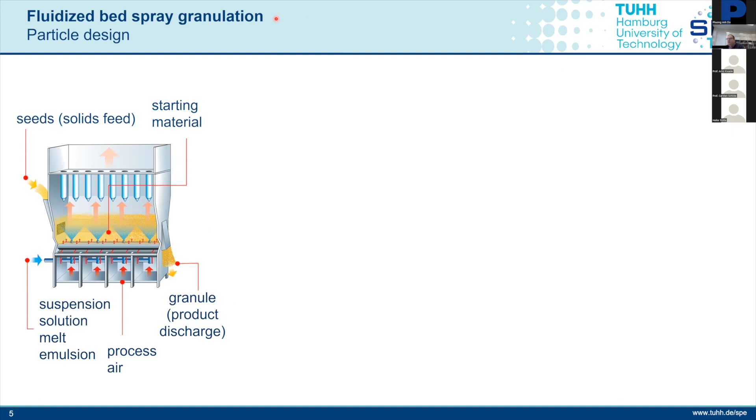Okay, let's go a bit to the developments which has been done since the last PARTEC. We can see that fluidized bed spray granulation is still a very hot topic, used for agglomeration or for coating and granulation, either to create very porous blackberry-like structures or core shell-like particles, onion-like structures. This can be used for many applications: fertilizer, detergent industry, production of catalysts, or instant powders.

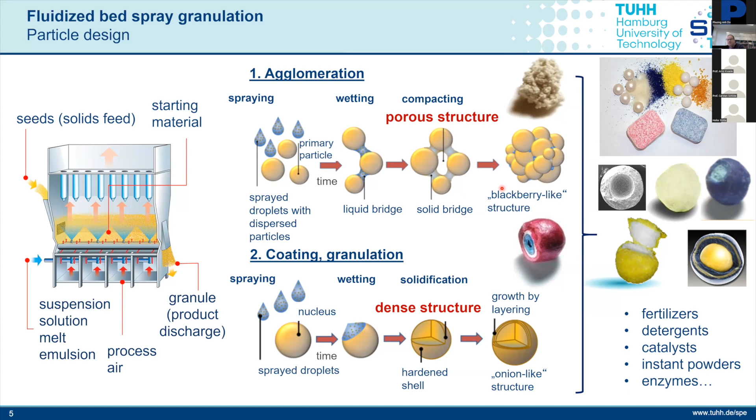In the meanwhile, we work on plant-based milk powders. That is also a hot topic, which was not actual in 2019. So plant-based materials, the coating of enzymes in biotechnology.

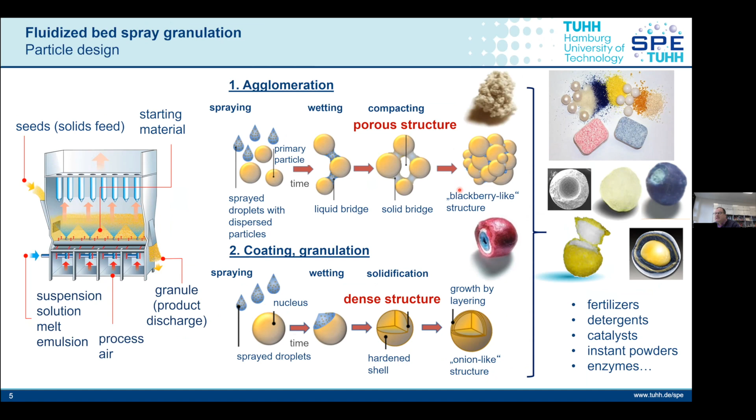What we have learned during that time is that we have a time schedule and a hierarchical landscape, so to say, of our different simulation approaches, which ranges from sub-micro versus micro, meso, macro scale. But nowadays we have also much better advanced measurement methods, and we have the hot topic of scale-up and digital twin, which came into this story.

And therefore we should also focus in the talk of Professor Schilde on this artificial neural network and digital twin work, which has been done during that time.

And of course, we can look into the particle structures by bonded particle modeling. We can also work and have extended the CFD-DEM approach. I will later on talk about recurrence CFD for real-time simulations of the flow structures.

And of course, the interaction with droplets. The question is what happens for the wet case. Finally, the flow sheet simulation is of great importance in the meanwhile, so we can really simulate very complex connected chains of processes with solids, and the instantaneous process is also of great importance.

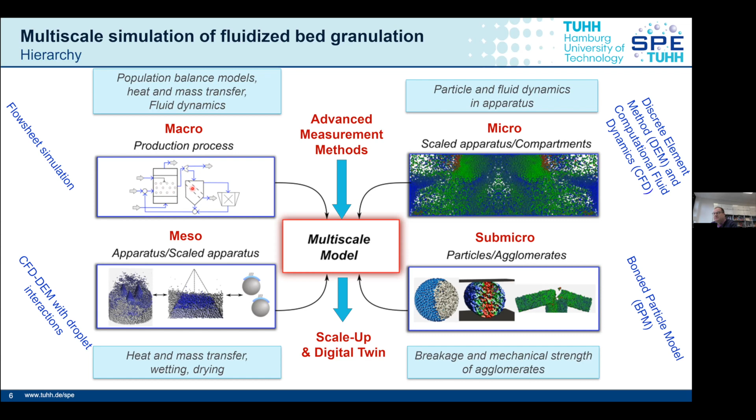And of course, also the advanced methods for the measurement of particle micromechanics. As you can see here now in this chart... you can see the collision between particles for the dry or wet case is nowadays measured, which wasn't possible a few years ago.

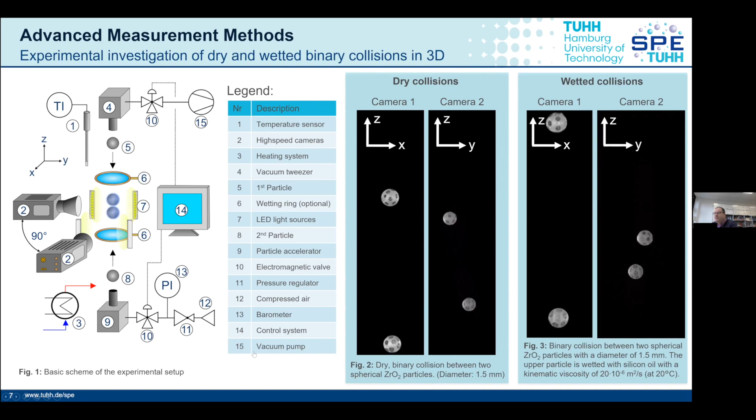So we want to develop criteria at which point such particles might bind together and form agglomerates. The computer is able to detect these collision events, to produce any kind of velocities, in translation and oblique direction, so we can calculate the rotation.

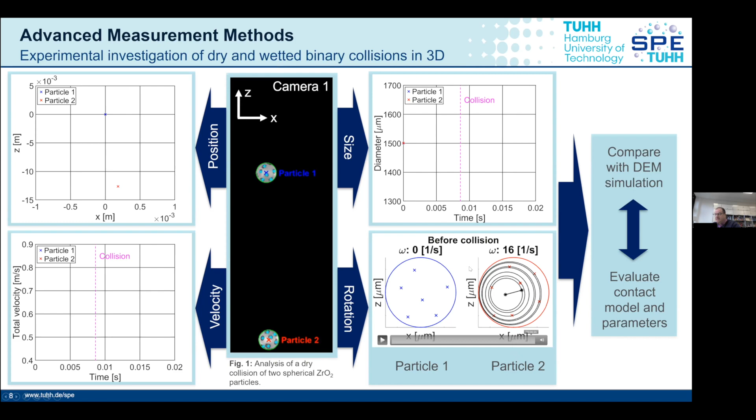This is, of course, very important to simulate the probability of the uniformity of these coating layers and to evaluate the model and the parameters, the calibration, so to say, of the DEM models. We have done a lot of effort in this direction.

Of course, for advanced measurement methods, it is very important to say that lots of development has been done regarding temperature measurement, moisture measurement. One can also measure online, in situ, these properties nowadays for the particle as well as for the gaseous phase.

The droplets can be measured, and also, of course, the question arises: what happens with a single particle, with a single grain? Are we able to measure the temperature directly in the process? We are working on that topic with such modified impedance spectroscopy sensors in the meanwhile.

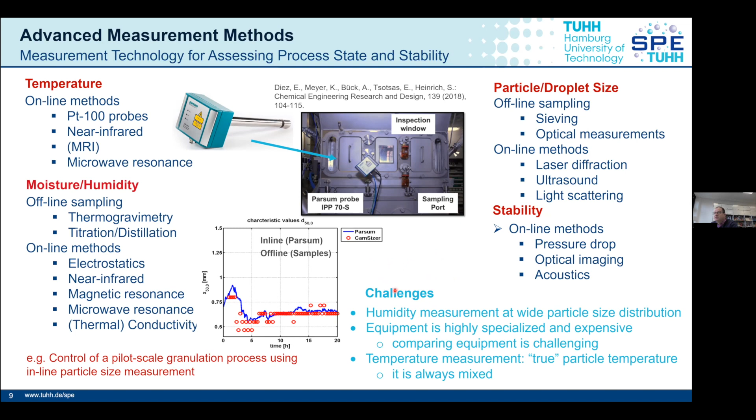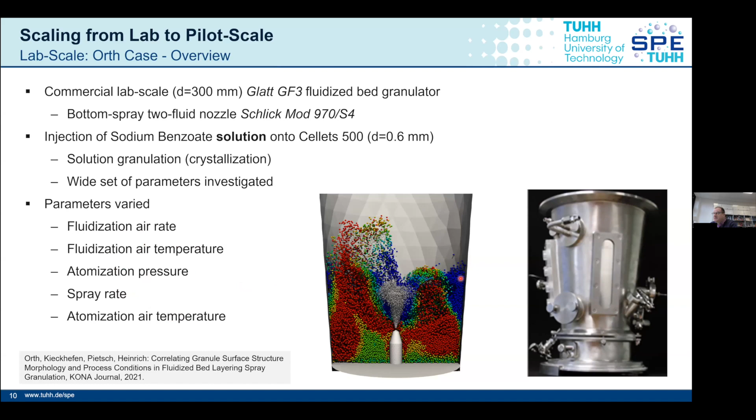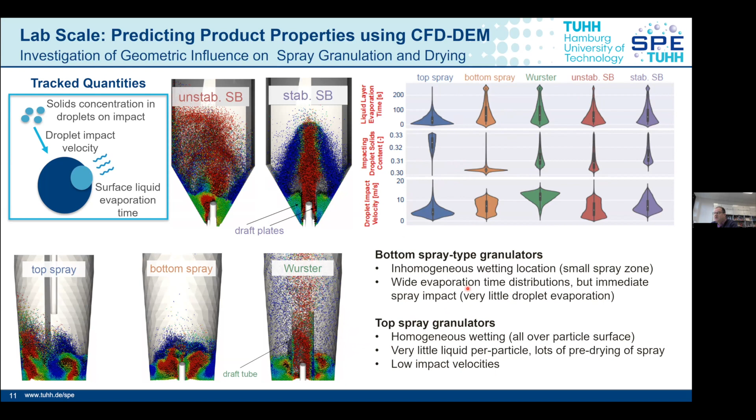Another very hot topic is, of course, the question: how many nozzles do we need in order to get a uniform distribution, especially also for continuous processing, and the scale-up from the small machine to the large unit, and to predict also particle properties like roughness of the surface. This strongly depends on the amount, on the number of droplets, and the uniformity in this reactor.

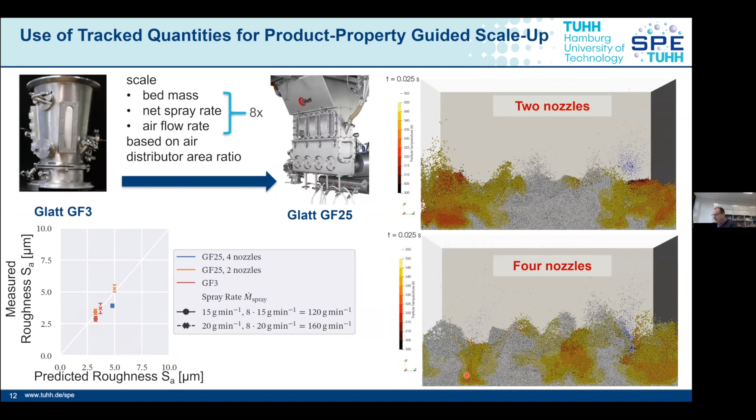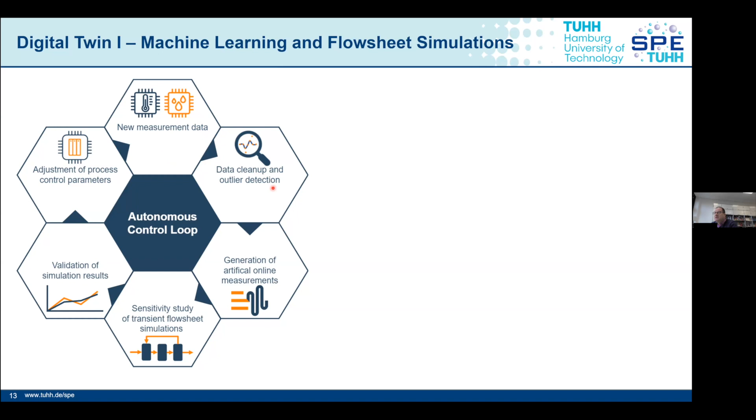In the meanwhile, we are able to calculate these out of the CFD-DEM simulations. But the next very big development has been done with respect to new measurement data, which we can detect, to develop also outlier detections. Here's an example with respect to digital twin. We apply nowadays the machine learning tools.

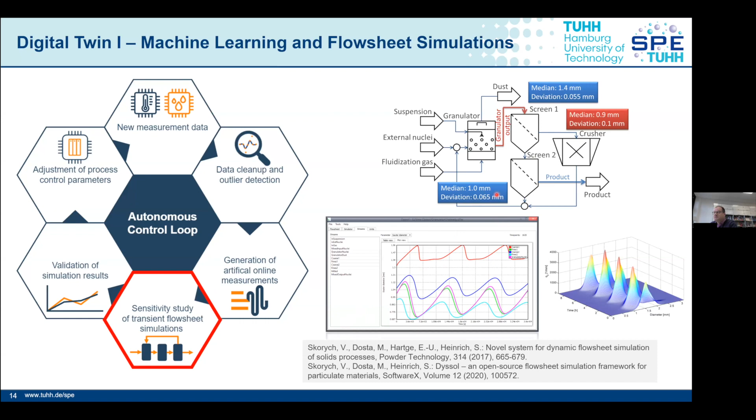Of course, the sensitivity study of transient flow sheet simulations is the very next big step, where we might prove such steady state or unsteady behavior by means of flow sheet simulation tools. For that, we have developed a flow sheet simulation software system, developed within our DFG priority program in Germany, which stands for dynamic simulation of solids processes, meaning we have instantaneous processes, batch and semi-batch, and so on.

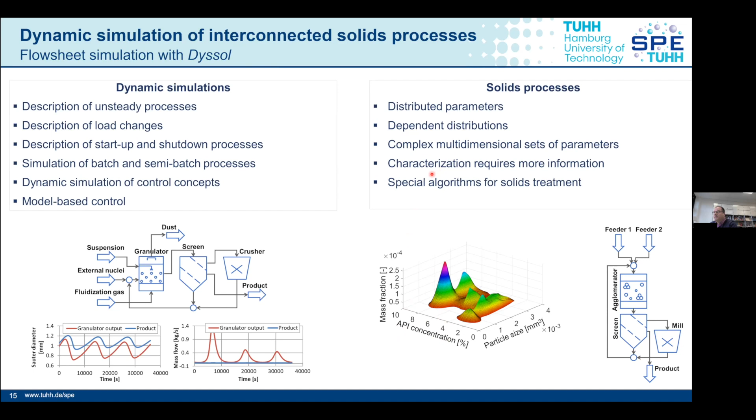We also have the distributed properties of the solids. Solids can have distributed properties like API concentration, very important for the pharmaceutical industry, moisture, particle size, and so on. This came into this dynamic flowsheet simulation software tool, Dyssol, which is now able to simulate very complex flow streams.

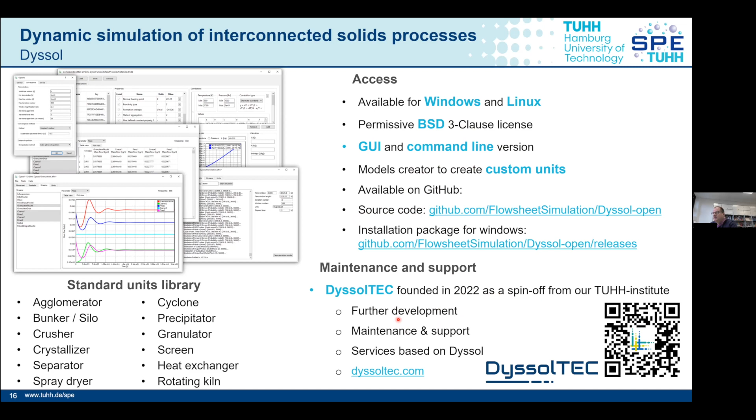And we have decided to go with open access. So we have, so to say, a source code which can be changed—an open source code. For the maintenance, a new company has been founded as a spin-off from our institute, so that this is now available for the community. It's open source based, which is very novel.

One of the last slides will show you the big picture of the digital twin. So we can now also go the second way, working with such recurrence surrogate assisted multiscale models, which describe the particle kinetics and also size distribution.

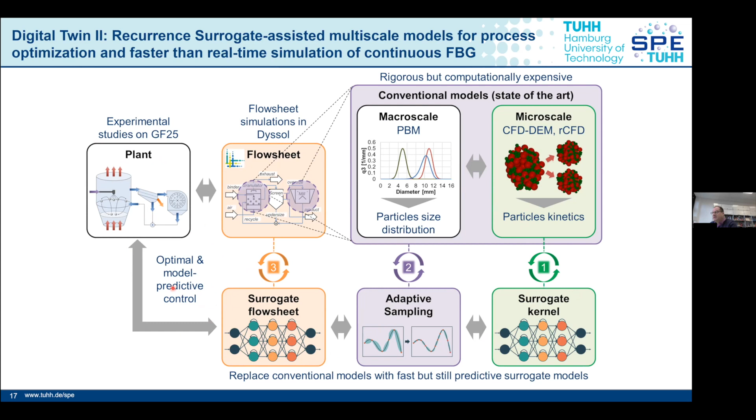With such surrogate kernels and adaptive sampling, we can feed the flow sheet with a surrogate approach, and compare this with the mechanistic flow sheet simulation tools, getting information for optimal and model predictive control—very important for control of the process. The hot topic here is the autonomous reactor concept, which is the underlying concept.

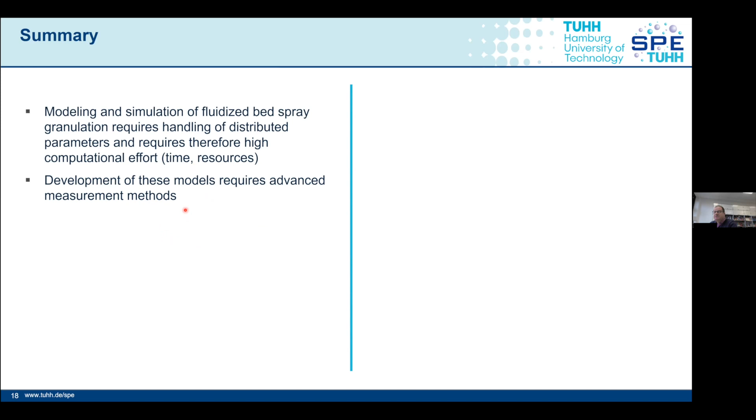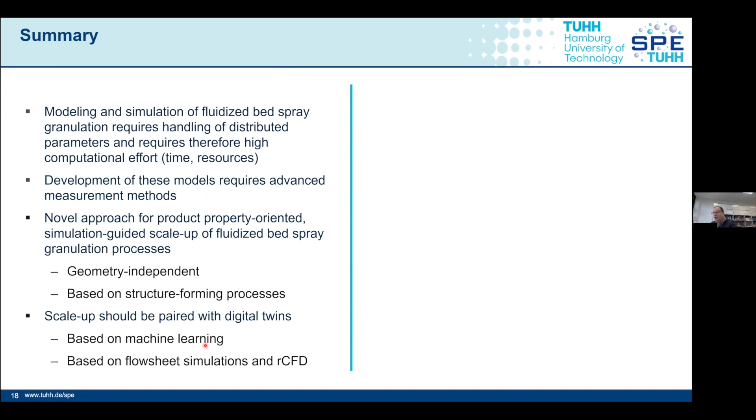To summarize, during the last years we were able to improve the approaches for this kind of simulation of fluidized beds, getting also information about particle properties, especially by using digital twins. That is a new hot topic during the last few years, based either on machine learning or on flow sheet simulations and recurrence CFD, which runs in real time, or faster than real time, meaning you need to do such CFD-DEM simulations, but by using such recurrence plots, you are able to be faster than real time.

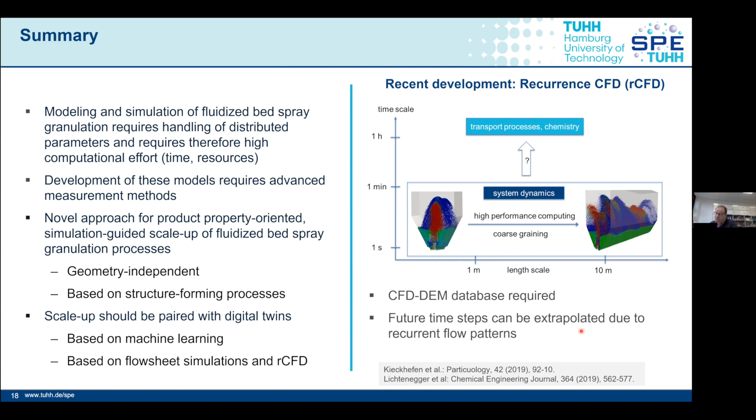The original work has been done by Stefan Pirker, Professor Pirker in Linz. We have some current projects together, and with this database you can go on for future time steps which can be extrapolated due to the recurrence flow patterns. That's really the beauty of this work.

What else is to say, in the meanwhile we are able, at least here in Hamburg, to look into systems with very high resolution with respect to time and local coordinates. We have the worldwide unique prototype machine of an MRI, which is in a vertical direction. The new director of the newly developed Institute of Process Imaging is Alexander Penn, who came from ETH Zurich.

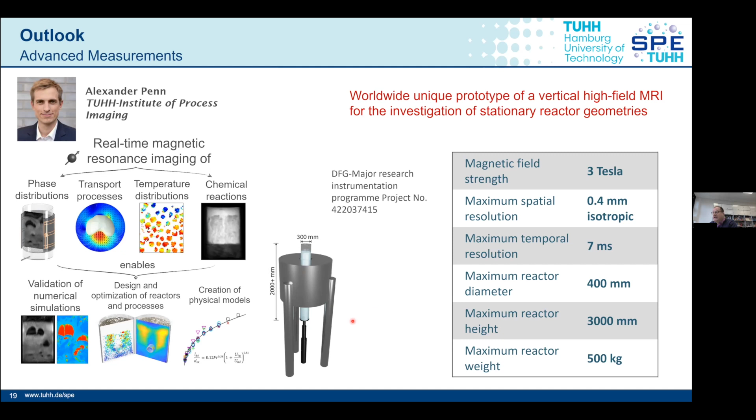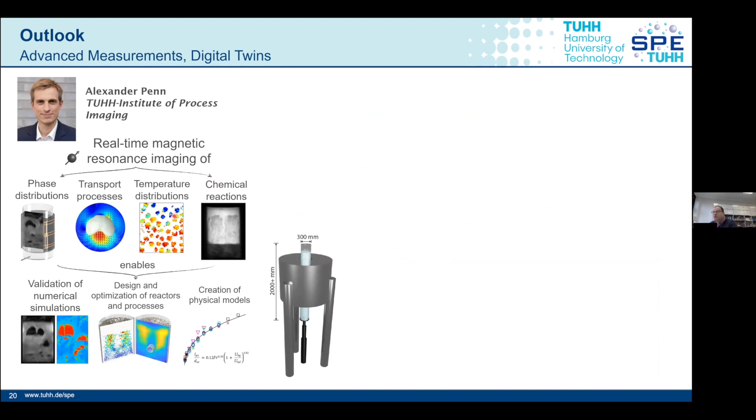Now we install such an MRI, which is 40 centimeters in diameter, so we can work with real larger lab or pilot plant scale fluidized beds, up to 3 meters in height. So we can measure the fluidized beds with respect to temperature, phase distributions, chemical reactions, and so on.

The next step required is that we adapt this information into such a communication interface in the so-called knowledge module for real-time data processing, based on flow sheet simulation and control theories, to really have online control of a large and small scaled fluidized bed system. So we can really adapt this information to a system which can be used then also in industry.

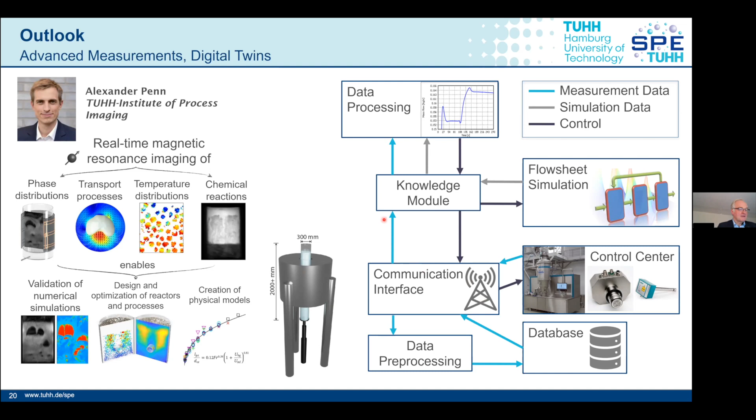As you already heard, for the new PARTEC 2023, we have the motto Particle Technology for Sustainable Products. I had the idea in this direction because everybody knows about climate change and the energy transition, and I think we have to do a lot of work in this direction. Hopefully I can show you in the next 10 to 15 minutes that particle technology can play a really important role in this transition and getting a more sustainable future.

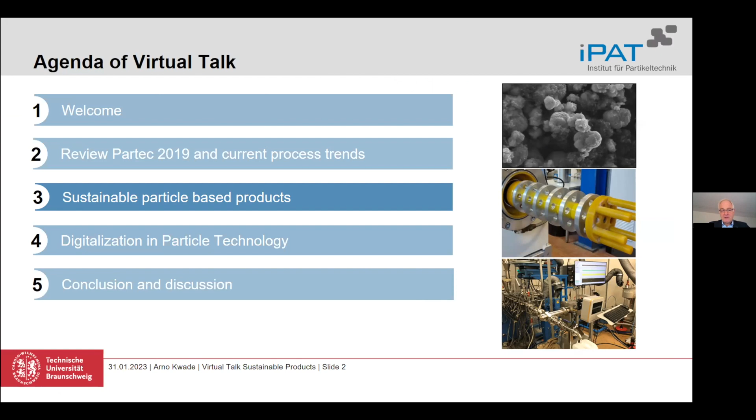So after Stefan has reviewed the Partec and also showed some current process trends, especially regarding fluidization, I want to come to the sustainable particle-based products. And first of all, some words on why it is important.

I think because we need new technologies, for example batteries and fuel cells, and I think we are lucky because these rely a lot on particle technology and on functionalized particles and also processing of particles, which I will show you a little bit later.

But in general, for all the processes we have in granulation, comminution, classification, separation and so on, we have to look at energy efficiency and also how we can save resources, like maybe also material. So that's also coming more and more into our focus.

Another thing that is getting more and more important, and there is also a governmental group looking in this direction, is circular economy. How we can install a circular economy in Germany, now for batteries as a very important topic, but also for other more classical products, because at the moment we rely a lot on primary materials from all over the world, and I think we have to come to a point where we rely on our own secondary materials, which we have in the country.

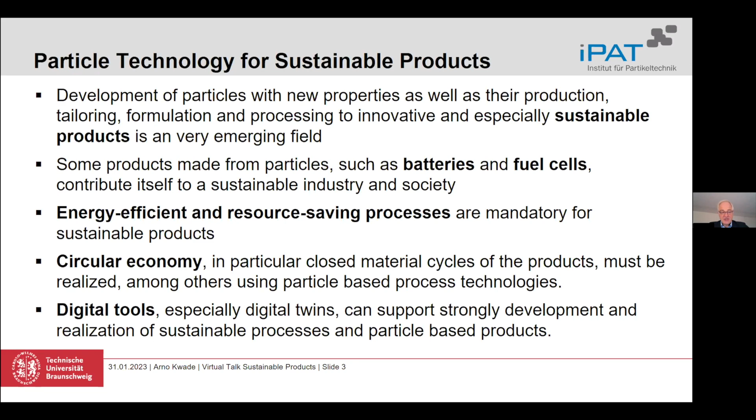And last but not least, digital tools. We just heard a lot about that from Stefan, but we will hear more about this new trend and also the new possibilities we have today. There was really a large change in the last years to use these digital tools to get much better processes.

So I thought about sustainable products and particle technology, and then I thought we can separate it into three parts. First of all, we can look at products which are based on particles and which increase sustainability, or which help us, especially for the energy transition. And this is, for example, lithium-ion batteries or other battery types which we will see in the future.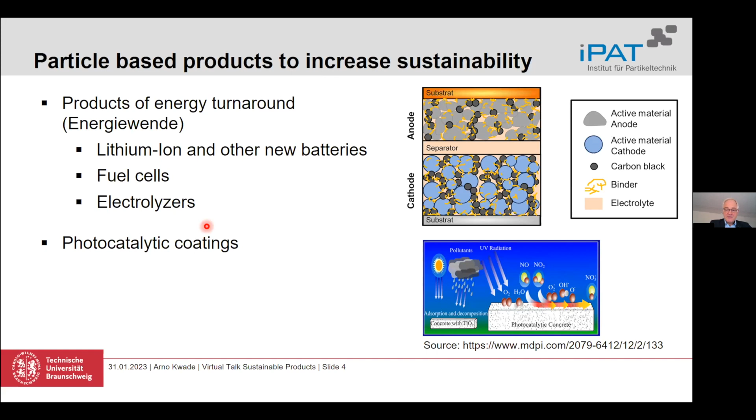Then photocatalytic coatings - I think it's not a new story, but this is getting more and more important to install really, so that they also have a long life cycle. And maybe also hydrogen storage can be a point which is interesting for particle technology. For example, I know about a hydrogen storage paste, which is based on particulate magnesium hydride.

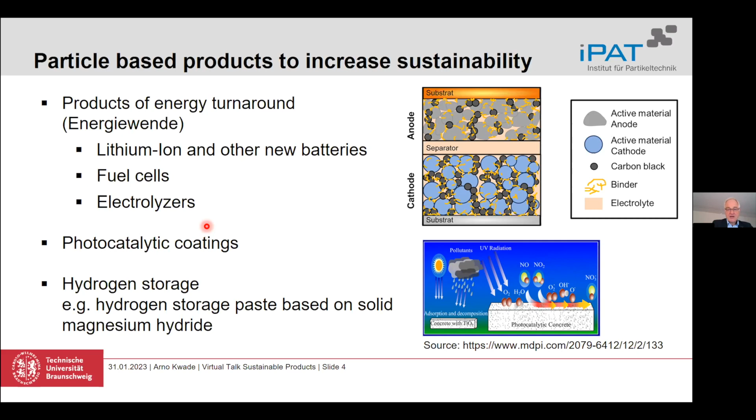Coming back to the lithium-ion batteries, maybe most of you, but maybe not all, know that these batteries are composed of particles. On the anode side, we have graphite particles or graphite and silicon particles today, and on the cathode side, these are lithium metal oxides or lithium metal phosphates.

And in these particles we store the energy by transporting ions via the separator, via the electrolyte, from the cathode to the anode if we charge the battery, and then during discharging from the anode back to the cathode.

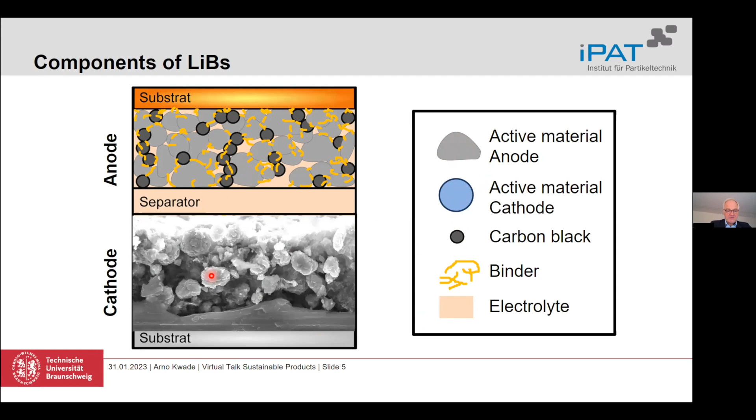And these particles, besides the active material particles which are graphite and these metal particles or metal oxide particles, we have some carbon additives which are important for electrical conductivity, some binder and so on. As you see here, these electrodes are composed of particles, so these particles have to be processed, synthesized, and recycled.

To give you an overview of what this means regarding mass, the amount of particles - if we look at all the factories planned in Europe today, you see that in 2025 we already talk about 3 million tons of these materials, and in 2030 about 4 million tons. So this is a really huge amount, and even in Germany, it's still a really big number.

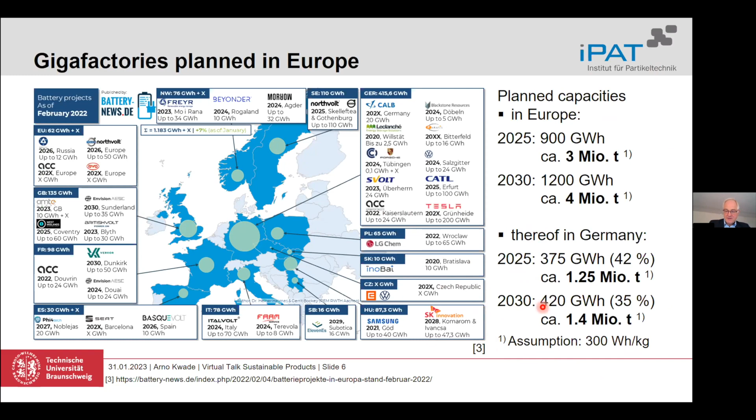Okay, now coming to the next point, we have to design our products in a sustainable way. What does it mean from my point of view?

We should use materials which have a sustainable footprint. For example, use secondary materials instead of primary materials, or materials which can be produced with a really minimum of energy and other resources.

Then also we should maximize the material efficiency, and maybe also using submicron particles, or nanoparticles, can give us a way to do that, so that we have less material but have the same function, the same property at the end.

For example, here showing it for drug particles. If you decrease the size, you need much less drug particles to get the same function in your body.

And also we should think really by designing a product about their reuse, the refurbishing, or especially also the recycling of this product. If we do so, then we can really keep all the material in a closed material circle, and we come to a really efficient circular economy, hopefully in the future. I think particle technology will play a major role that we achieve this goal.

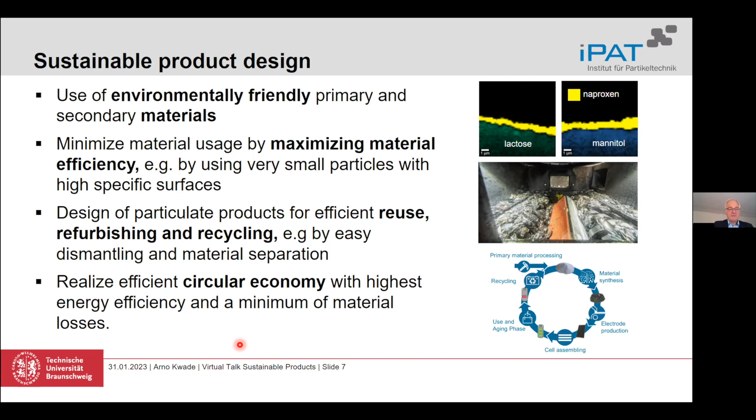And I know that the governmental ministries are really pushing this theme for the future, and we will probably get a lot of new rules that we have to fulfill to come to this point. I want to show you this as an example again for batteries.

So in the moment we use primary materials coming from different countries all over the world, which have to be processed, and a lot of energy is used for this material. Today, the CO2 footprint of a battery cell is only coming 20% from the production in the gigafactory itself.

So 80% is coming from the production of the material, and a lot is in mining and also further processing of these materials.

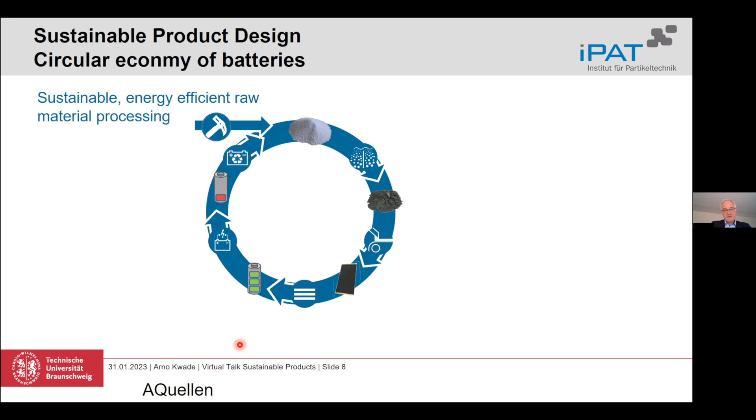That means we need really sustainable produced active and passive materials, maybe also looking for new possibilities. Then we have to have a sufficient, energy efficient and resource efficient production. I will show you later 2 examples how we can achieve that.

Then we need good cell design, closed material circles, and good recycling processes. And these recycling processes, again, should also be efficient. So we should look at the battery cell today already in a way that we can have an efficient recycling.

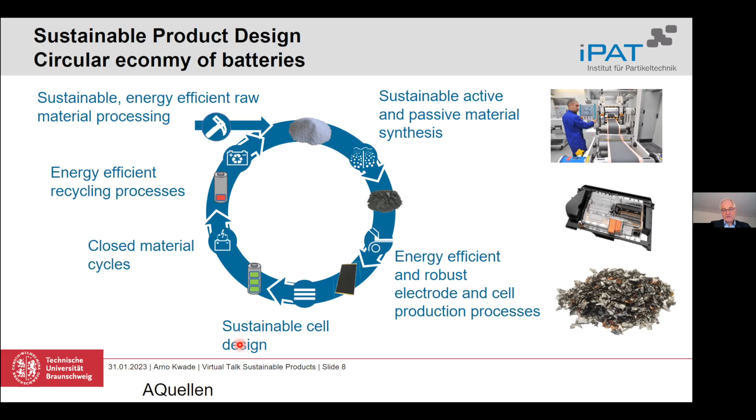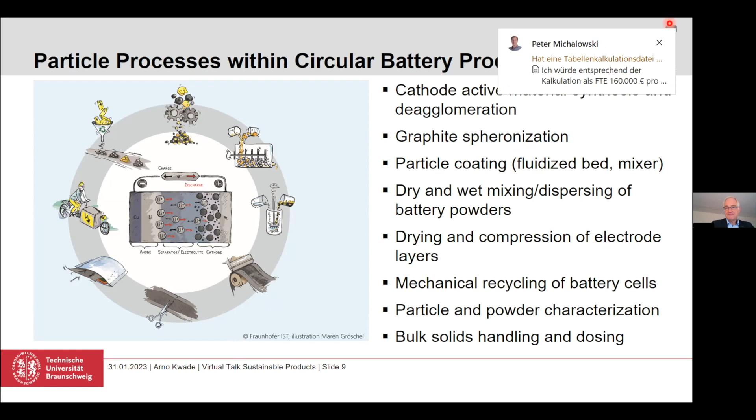But what can particle technology do in this direction? From my point of view, there's the synthesis of cathode active materials. So we need reactors, we need filtration, we need a de-agglomeration or dispersing step, so we need some graphite spheronization.

For example, on the anode side, also a very important process, particle coating, functionalization in a fluidized bed, like Stefan has shown before, or maybe also in a mixer. We had then for producing the electrodes, the dry and wet mixing processes of the battery powders.

And today I will show you later the trend is going to full dry processes. So there's a lot of particle technology and machinery required. Then the drying and the compression of the electrode layers, mechanical recycling, also particle and powder characterization.

So in the lab, but also online and inline, like Stefan showed, that is also something what is very important. And bulk solids handling and dosing are other things.

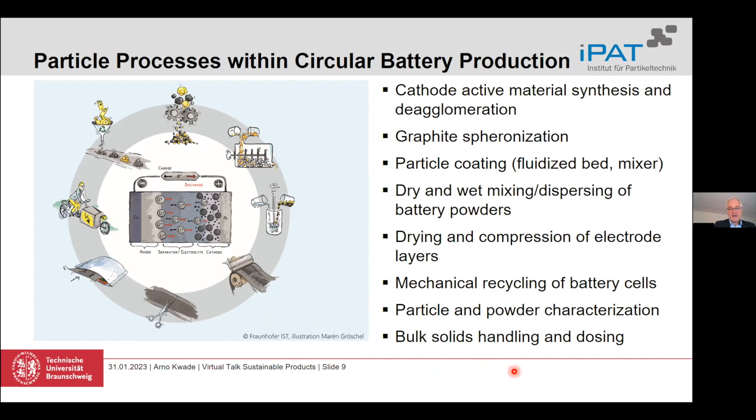Another example: in the gigafactories, we will also have a lot of scrap. At the beginning, we talk about maybe 20% of the material which will be scrap. Later on, probably maybe less than 10%, but still, if it's 10%, we are talking about more than 100,000 tons of scrap a year only in Germany.

And this has to be handled somehow. So we have to develop processes where we maybe cut these electrodes, screen and de-agglomerate our active material, redisperse it and so on.

And also we can maybe, instead of a dry process, use a wet process if we then have a wet coating afterwards. So there's a lot to be done, and also we have to develop machinery which is able to do that.

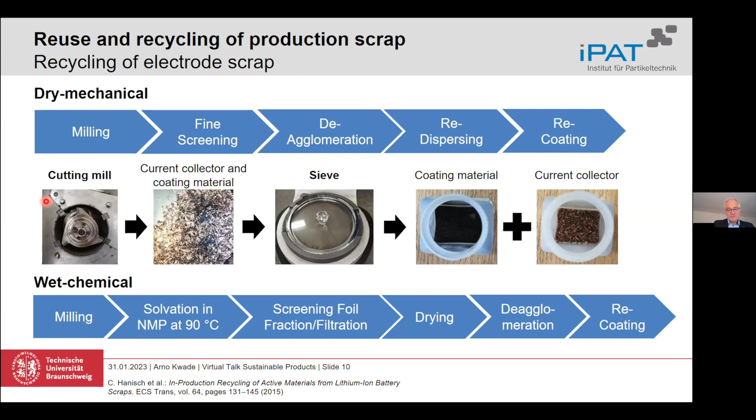And the last point is we need sustainable processes. So we have to maximize the energy efficiency, for example, in all the grinding processes, because about 4 to 5% of the overall electrical energy goes into grinding.

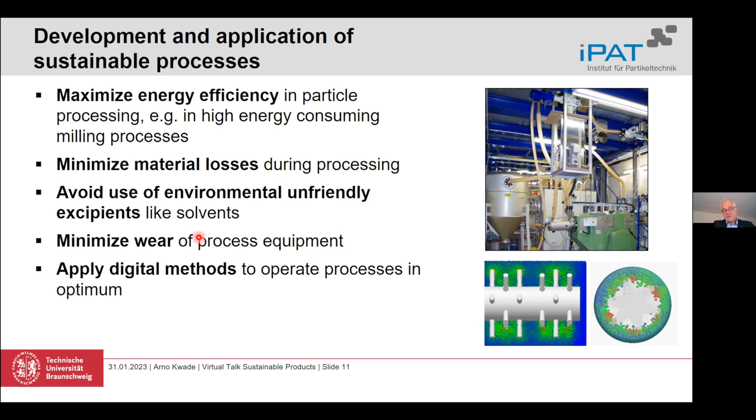We have to minimize material losses, avoid unfriendly excipients like solvents which are not water, for example, minimize wear, and also use digital methods. Here's an example, an alternative method to produce battery electrodes, which uses maybe 20% of the energy as today.

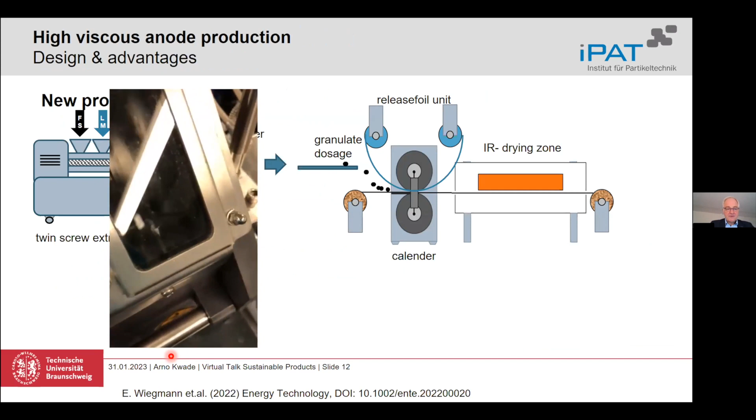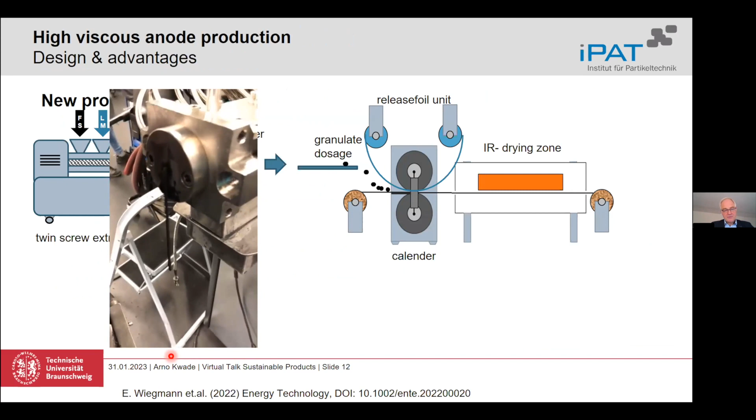So we have here an extrusion of granules, so it's really some particles. Normally it's cut with a knife, like in the pharmaceutical industry. So you get very wet granules, which are here in this small bin, and then you put them on the coating. In this case, it's a calendering coating, so not a typical coating.

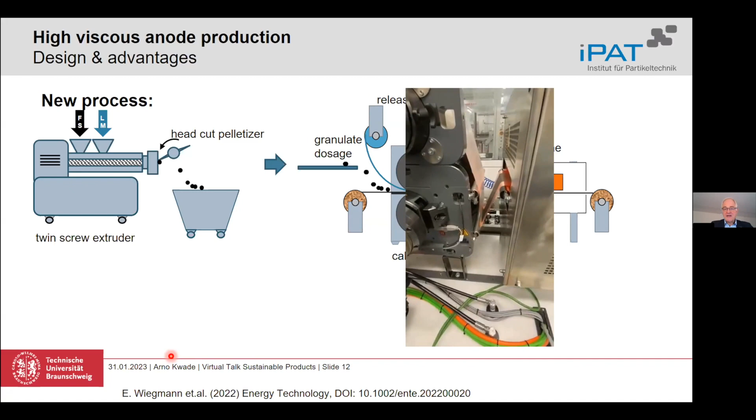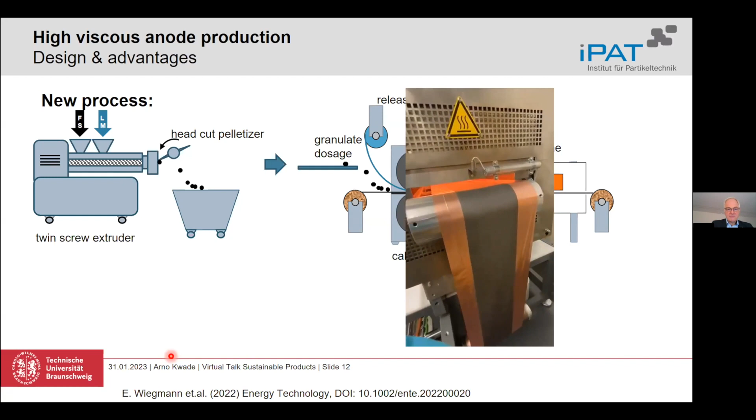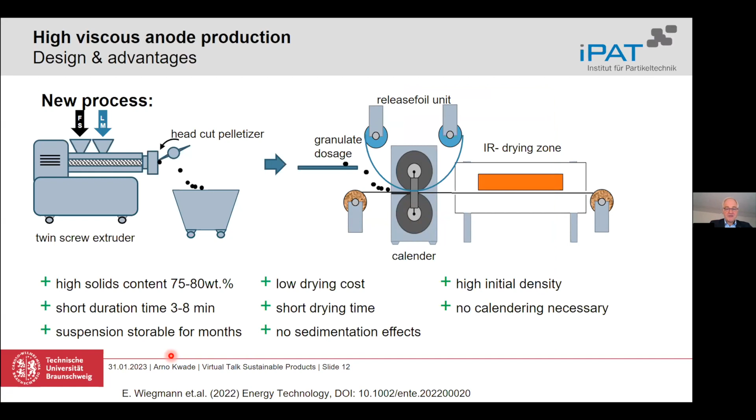As you see with these granules, we can produce really nice electrodes like for a normal wet coating, and this is what we are looking for. We need much less energy, have a really short duration time, and need much less space for the machinery and so on. But this has to be developed regarding particle technology.

And what in the moment is really a hot topic, also due to Tesla, is a full dry coating of these electrodes, and for this we need dry mixing processes with good dosing. We had dosing systems, for example, with this calendering dry electrode processing, but there are also other methods to produce a dry electrode.

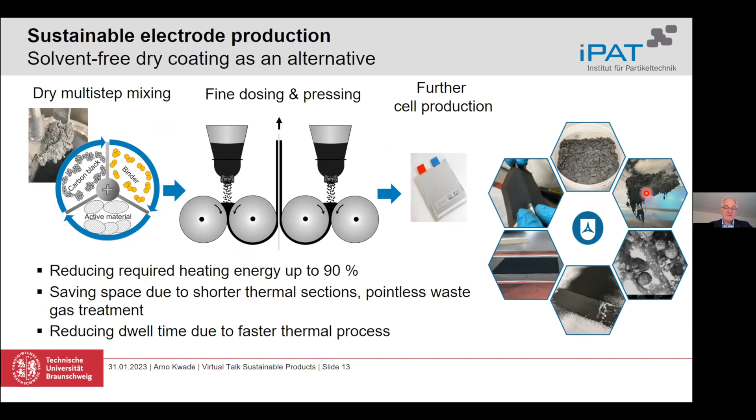You see they have not easy flow properties, I would say, and there's a lot to do to bring this into industrial scale. And with this, I want to conclude.

I hope I could show you that there's a high potential, or a high need, for social and economic work to increase the sustainability of our products today, and also in the field of particle technology. One major trend is the circular production of products, and one example could be the new lithium-ion batteries.

And overall, for all the processes, we have to look at minimization of specific energy, and also maybe using dry processes instead of wet processes to come to a more sustainable future of our world.

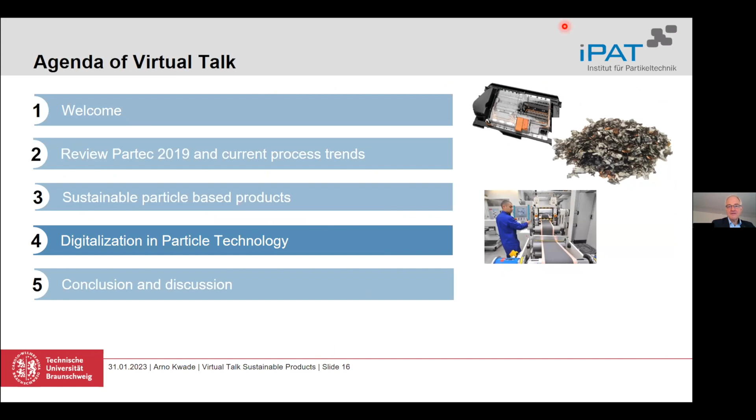I will summarize a little bit what's happening in the field of digital twins and cyber physical production systems related to particle technology. Overall, I just can give a small overview on this topic, since the progress in this field of research is enormous at the moment.

Due to the efforts in data-driven methods and digital twin developments, the online measurements and the development of new online measurements is increasing more and more. From these online measurements, we get our data, we have to post-process it, and then we feed it into our cyber world.

That means here we have our digital twins, and a digital twin could be a numerical model, as we already have seen for the discrete element modeling, could be an analytical model, but could also be one of the more or less new data-driven models.

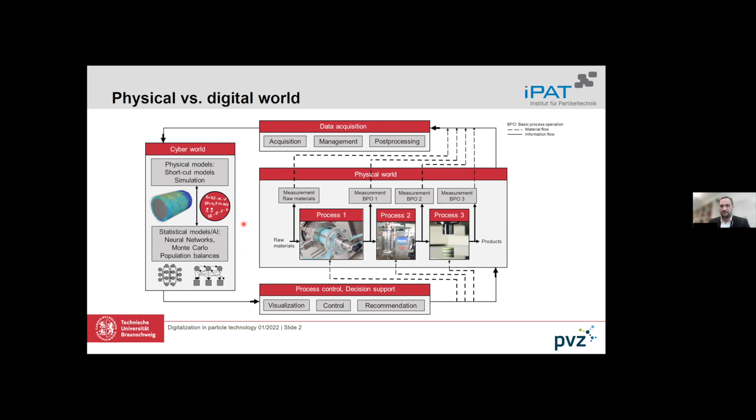These deeper insights into the process lead us to several application fields for optimization. For example, we can optimize the geometry of a single process unit, have a process design regarding formulation and process parameters, and have process control of our machinery and even of our whole production plant.

We have quality management. We can take a look at maintenance if something went wrong, or look at anomalies in the process. We can look at energy and resource management, meaning the sustainability of our process chain or single process unit. We have production planning and control, or even factory planning and design at the end.

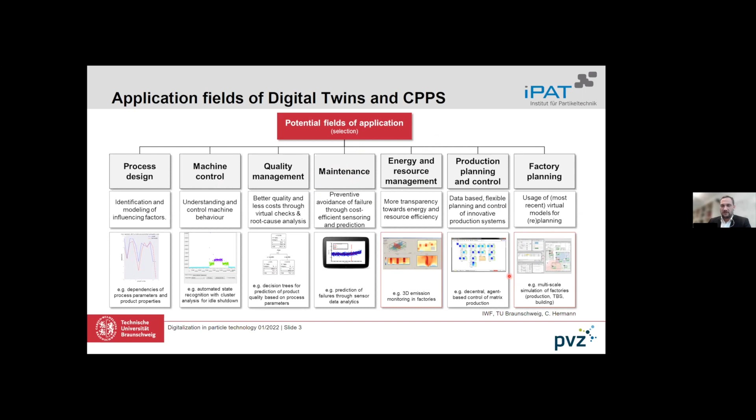And this is all just possible due to the huge increase in computational power in the last years, which is normally according to Moore's law. But apart from Moore's law, which leads to a very slow increase, we also have the increase in algorithmic efficiency.

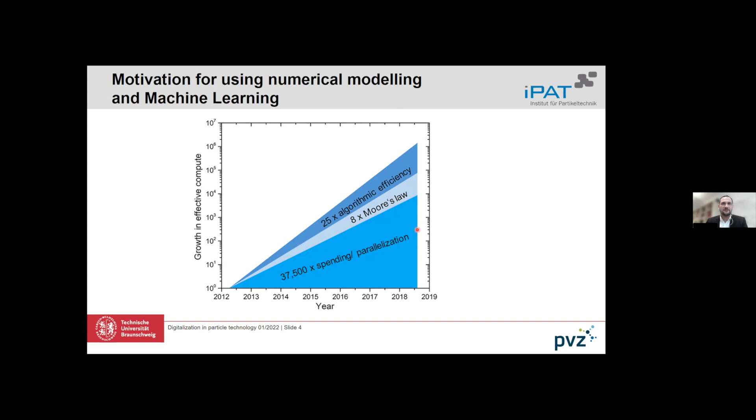That means new algorithms and new methods are popping up, and also the effort spent in parallelization of modeling leads to an enormous increase in our computational power, which can then be used to have numerical methods as well as data-driven methods as a digital twin to do something for our process in reality. And this is coming more and more in recent years.

If we now start with the discrete element method or classical numerical modeling, the state of the art is that we are able to simulate nearly all particulate processes along the whole process chain, starting from particle synthesis and surface modification, the formulation of particles and further processing, as well as the resulting particulate structures and their properties. That could be, for example, a spray drying process or a dispersion process in a dissolver.

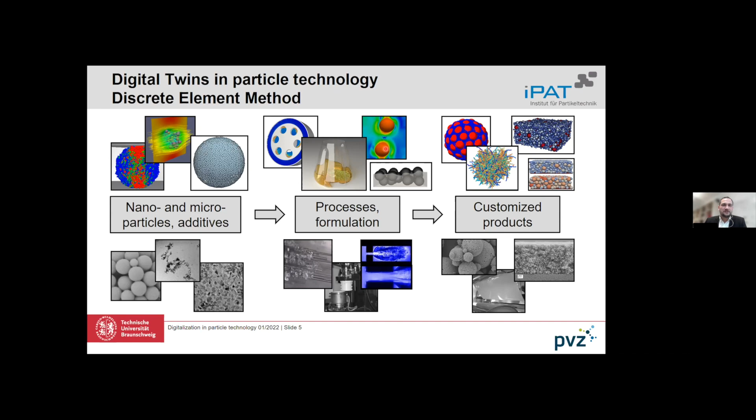This is one part of having a digital twin, which gives us deeper insight on the different modeling scales, from the scale of just looking between two grinding beads and the product particles, to the whole process in the mill. Additionally, now we are coming to the data-driven methods, which are a new method and a new toolbox of methods.

This toolbox contains the well-known artificial neural networks, as well as convolutional networks, hidden Markov models, various genetic algorithms, or symbolic programming tools, which can be used based on data. That means they are very suitable for experimental results if we have a lot of data, or especially for numerical simulations, because here we get a bunch of data and can gain a better process understanding of these simulations.

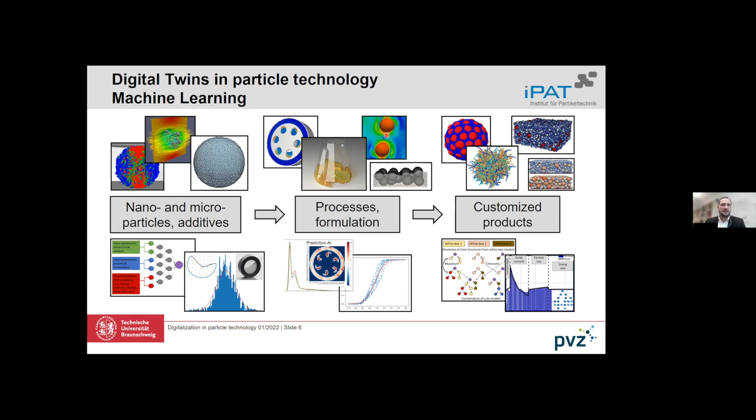The easiest way to use a data-driven model is to just use an artificial neural network for a grinding process within such a stirred media mill, and then feed in all process and formulation parameters and look, for example, at the median particle size. On the right side, you see the prediction versus the measurement, which matches quite well.

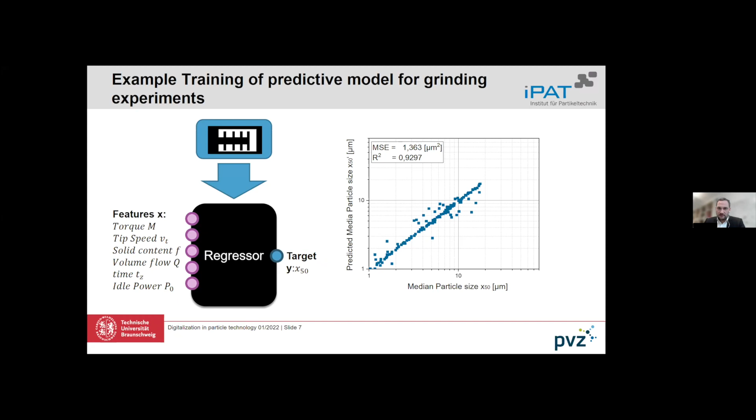However, in most cases, these methods are very limited to the formulation, to the geometry, to the scale of our system, and since they have a black box character.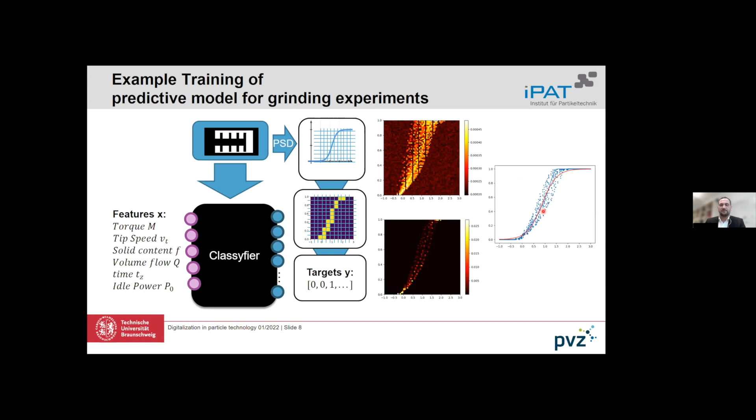But there are also some new methods to translate these black box methods into white box models or hybrid models. Just as an example to show how it works for the simulation, here the CFD-DEM simulation of a stirred media mill is shown.

With this simulation, you can differentiate the whole mill into voxels. Here you can put in 30 to 40,000 voxels within the mill and then predict the 3-dimensional velocity distribution or stress energy distribution within, with the help of an artificial neural network.

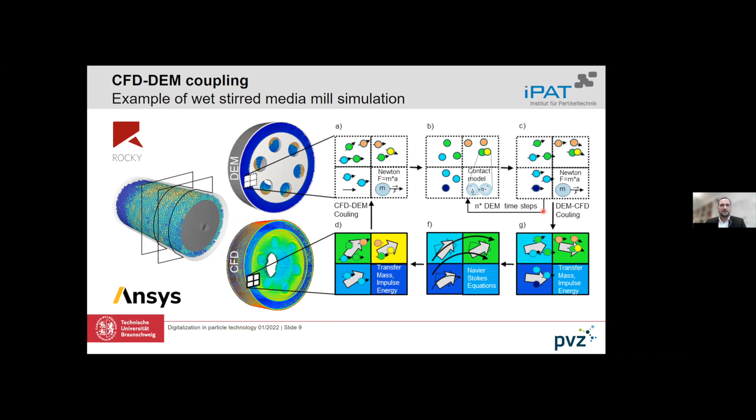That this works is shown here on the next slide, where the mill is cut into different slices, and for each slice the relative velocity in these zones is predicted and compared to the simulation. This works very well, and it is based on 10 to 20 simulations.

What does this mean? It means if we want to have a full process window and description of a broad process window and optimize the process, then we can use this artificial neural network to predict values within seconds, where we would need 1 to 10 years if we used the CFD-DEM simulations instead. This gives us the possibility for very fast process optimization and design, and makes the numerical simulations even much more efficient than in the past.

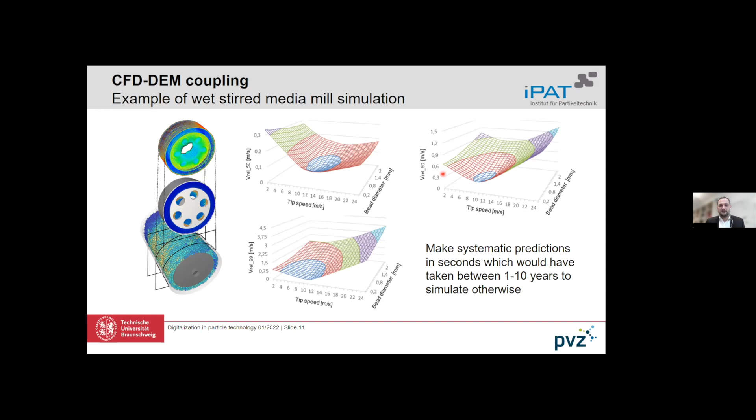There is also the possibility now to not only simulate spherical particles, but also non-spherical particles of irregular shaped morphologies. Here we can also use data-driven models to measure 2D pictures via dynamic image analysis or via microscopy, scanning electron microscopy.

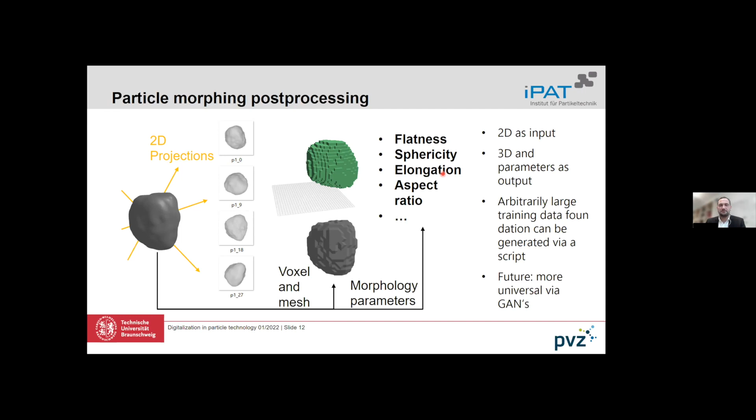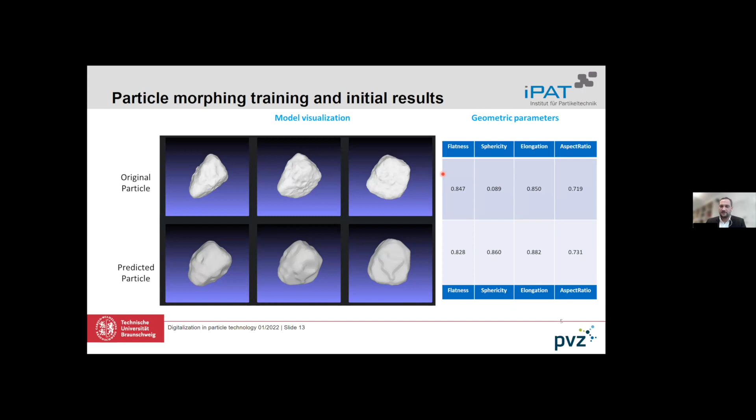Based on these 2D images, we can use existing frameworks to transfer them into average three-dimensional particles, which can then be used again in classical numerical simulations. This is shown here, where we have some original particles and then the predicted ones based on average numbers, which also works well.

All these methods give us insight into the modeling and how things work. And if we're now thinking about deriving models, for example for process modeling, then we need fast models, fast shortcut models, derived out of these numerical simulations and data-driven models.

In industry, you have highly complex systems, high interdependencies, budget and time constraints. And the modeling tools have some lacks regarding time consumption, high theoretical results, or black box characters. But there are...

...possibilities to combine different methods coming from shortcut models and models from literature, from forces which are inputs for DEM simulations, and new methods of neural networks and genetic algorithms, to create new frameworks which automatically derive these equations and hybrid models. We call them physically inspired hybrid models, used further for scale up, process design, process optimization, and simulation of a whole process chain.

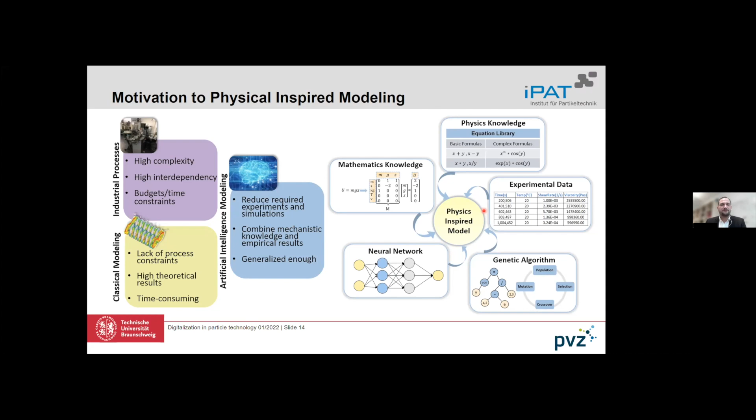And this is then called a cyber physical production system. Here we have one method of these.

It's, for example, the flowsheet simulation. We saw it from Stefan Heinrich's slides before, where we have different process units with models behind, which should be hybrid models or at least mechanistic models, and they are connected to other process units with other models.

And here we can now handle bulk solids with complex multidimensional sets of distributed parameters. We have unsteady processes, shutdown and startup processes, batch and continuous processes.

This is just an example to show how it works, where typically we have a large fluctuation in the product quality and also intermediate qualities, for example here the granulator output.

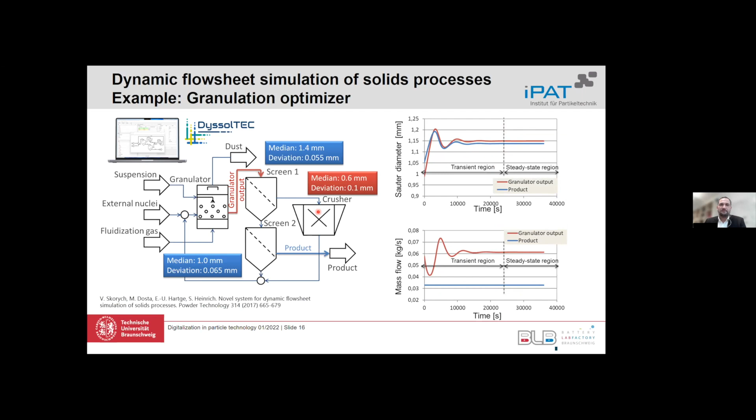With the usage of this flowsheet simulation tool, we are able to get more stable values, meaning a stable product quality at the end of our system. So therewith, I'm at the end of the talk, and I think now we are all open for questions.

Yeah, thank you, Carsten, and thank you, Stefan.

As just said, now we are here for answering questions. I haven't seen something in the tool, but Mrs. Dosch, you are the head of the discussion, let's say.

Yes, thank you for the interesting talks and presentations. Now at the end, we will bring all the speakers on stage again with me so that we can start our little Q&A session to the talks.

The first question I have is, how much will the producers of mechanics and equipment for powder processing profit from the new products of energy transition? Could you answer that, please?

Maybe I start, because it was in my presentation. I think a lot. I hope I could show that with the new products we now get, a lot of companies start to plan their factories. They need a lot of equipment from particle technology. So a lot of equipment which is normally seen in PARTEC will be used in these new factories. From my point of view, it's very important.